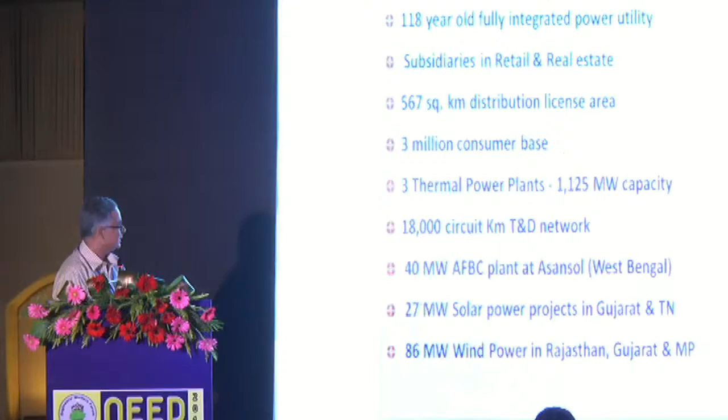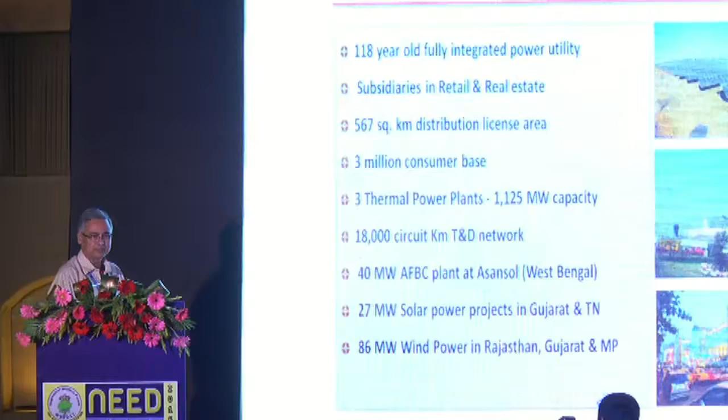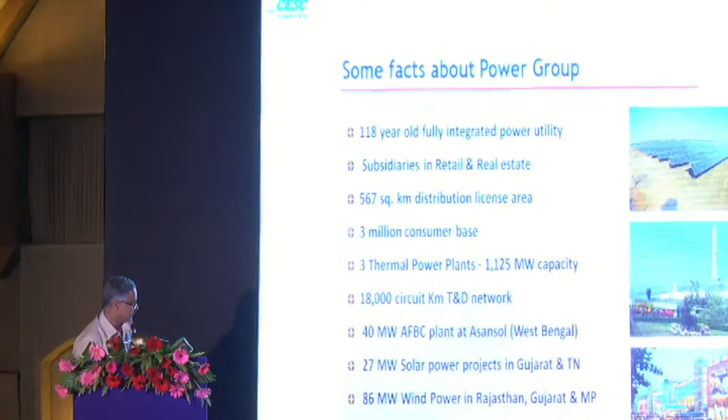A brief note about the power group of CESC. We are, as many of you know, a 118-year-old company. We have subsidiaries in retail and real estate, and we supply power to the city of Calcutta with a 3 million consumer base right now, and 3 thermal power plants in and around the city, 1125 megawatt capacity. We also have a 40 megawatt plant operated by our subsidiary in Asansol, an AFBC plant, and we have diversified to wind and solar, but that is not in West Bengal—it is in the states of Rajasthan, Gujarat, MP and Tamil Nadu. So 27 megawatt of solar and 86 megawatt of wind power.

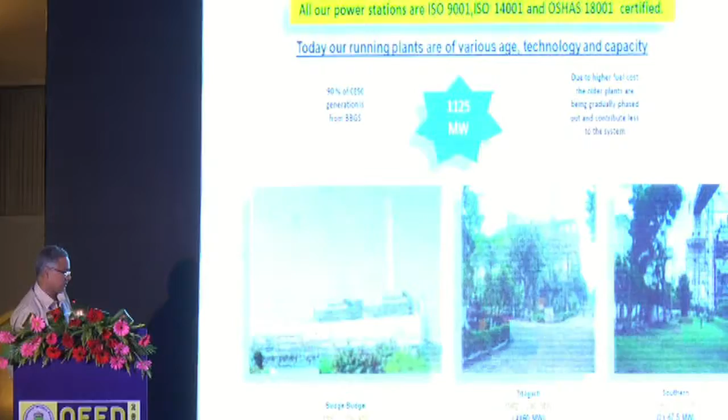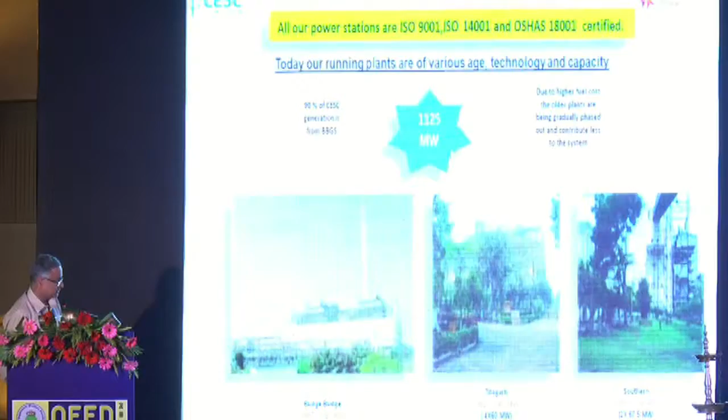As I was telling, we have 3 thermal power stations. The earliest one was Titagarh, set up in 1982, that is 240 megawatts. Next we had Southern Generating Station, set up in 1990, 67.5 into 2. And the latest was Budge Budge, 3 into 250 megawatts, started in 1996-97, and the third unit was finally put up in 2009.

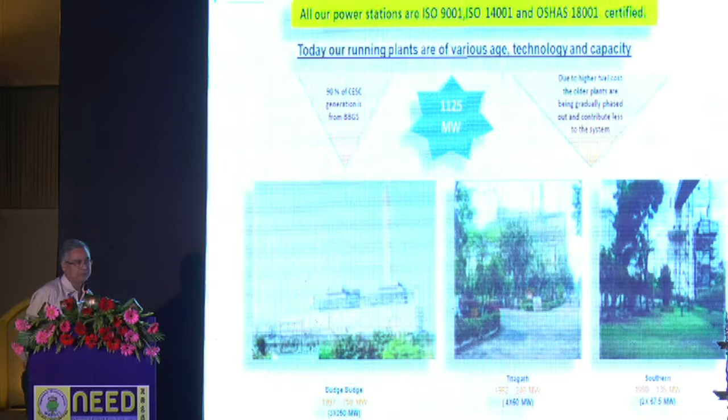Basically, 90% of generation currently is from Budge Budge, and as I've said, due to higher fuel cost, the older plants are being gradually phased out and they contribute considerably less to the system. So the competitiveness has somewhat been lost for these 2 plants, and that is why the generation has been reduced.

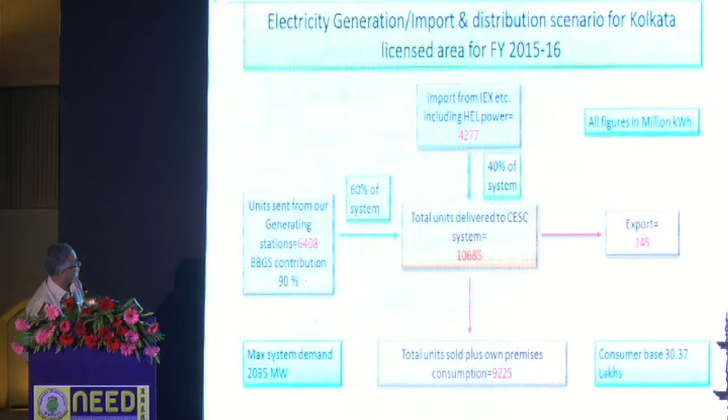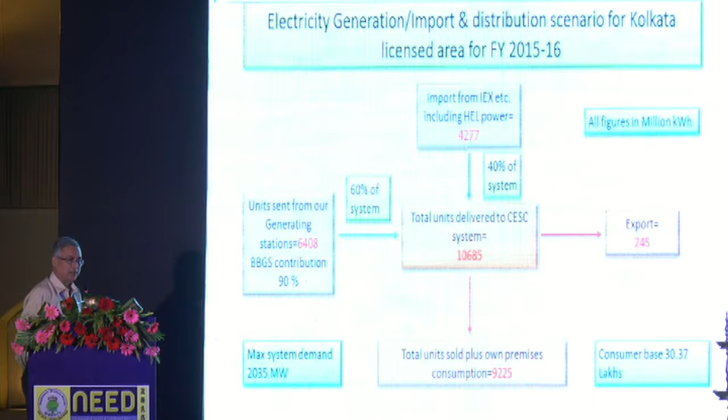This is a brief idea about the import, generation and distribution scenario for the Kolkata licensed area for the last financial year. The total units delivered to the CESC system, that is the 567 square kilometers, was 10,685 million units, of which the power generating stations contributed 6,400. About 4,000 came from Haldia Energy, and the units sold were 9,225, with a small amount exported. So basically, 60% of the power now comes from Budge Budge, and the rest, about 40%, is from Haldia and the power exchange. We do have to import power from the power exchange sometimes.

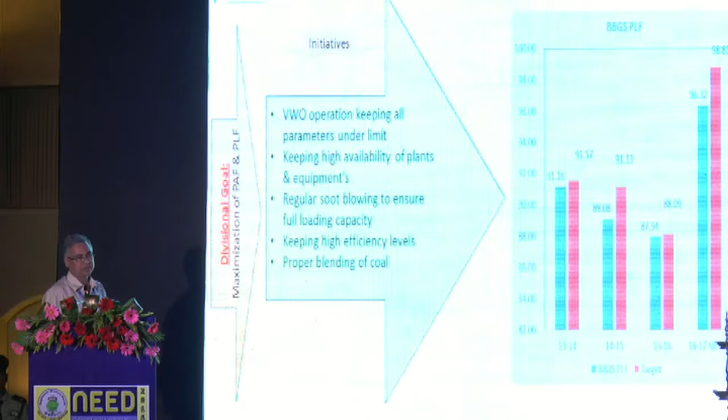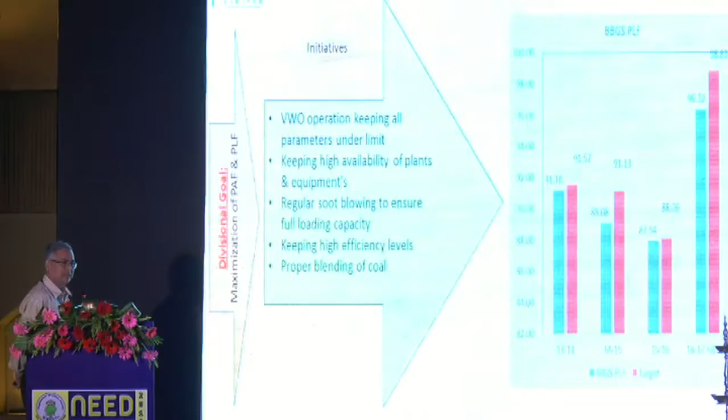So basically, in tune with today's topic of competitiveness, I would like to share some of the practices we do to keep the PAF, PLF, etc. of CESC plants at a high level. These are all listed here: VWO operation, keeping all parameters under limits for high availability of plants, and regular soot blowing to ensure full loading capacity. This is done in every shift, that is thrice a day, almost all the days.

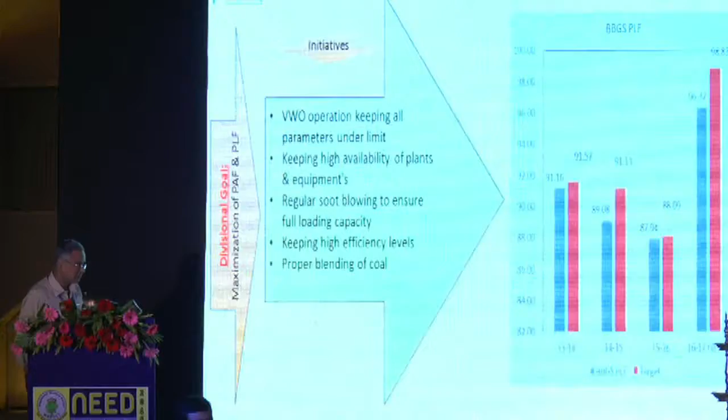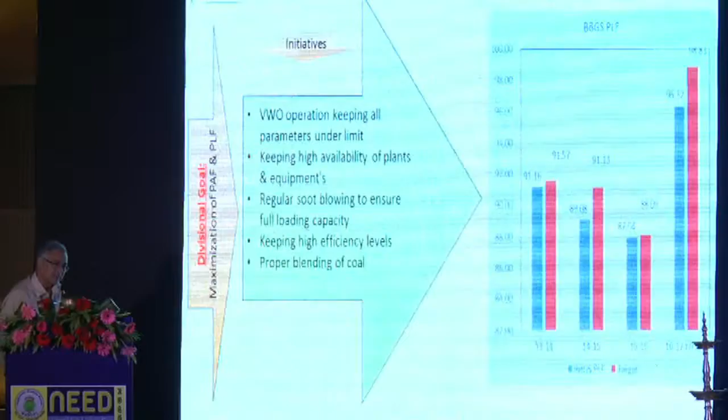As some of the earlier speakers were telling, judicious blending of coal is important. So we have to have some imported coal. We buy coal from BCCL, from ECL, and also from MCL. Some of these are very high in calorific value, some are low, so we resort to blending of coal in order to get the correct value of coal in the boiler, which is around 3,800 to 4,000—that is the design requirement.

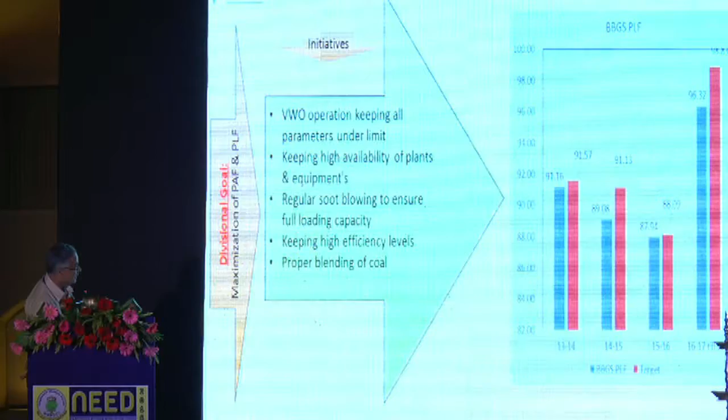As the graph beside this shows, these are the Budge Budge parameters. We are having a very high level of PLF, and in 15-16 it has shown a decrease, which is because of the increased generation from the Haldia plant.

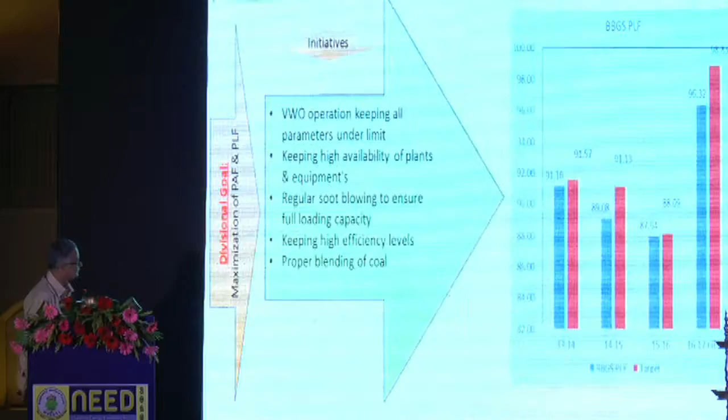Some other best practices we would like to share with the personnel assembled here: for the availability factors, we have to keep the outage period down. That is why we have resorted to working in 3 shifts, and our forced outage periods and planned outage periods are among the shortest.

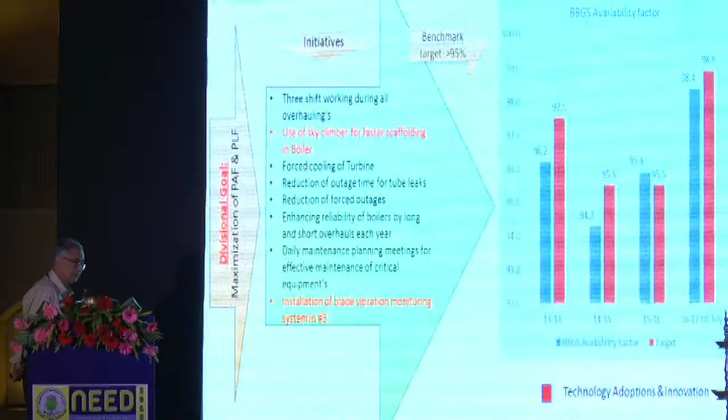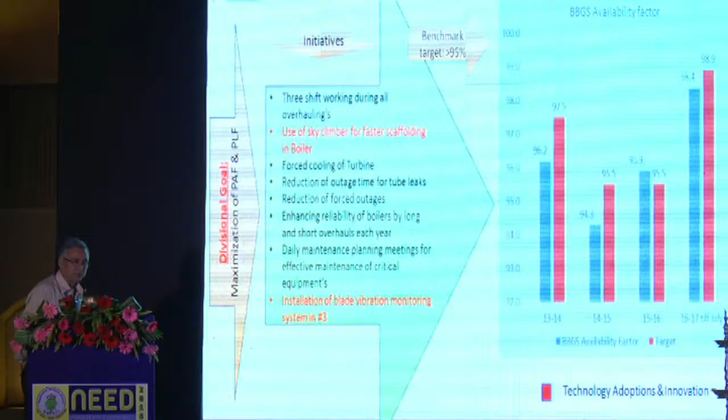Some of the other things which have helped us reduce the overall planned outage period are the use of sky climbers for fast scaffolding inside the boiler. We are also practicing forced cooling of all the turbines in the CESC system. Earlier, for the plant shutdown to start, it used to take 3 days for the turbine to cool down. But now, employing forced cooling on all the turbines in the CESC system, we are able to start work within 24 hours.

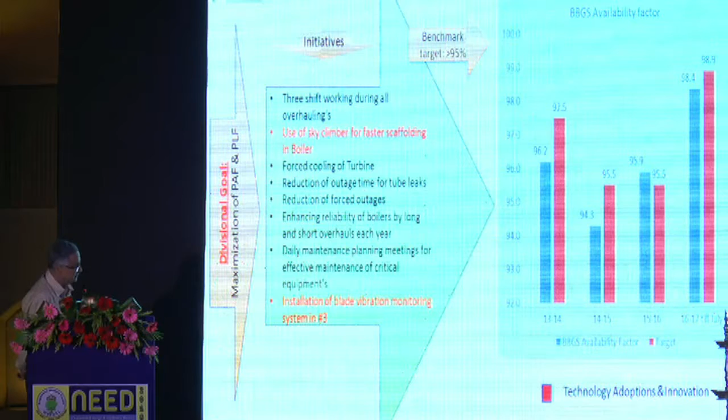This forced cooling has been done in collaboration with the OEM, and they have permitted us to use forced cooling with air, and this has helped us reduce the period. Consider this: it's only 1 day before we can start the job. Earlier it used to be 3 days.

One other factor is we attend tube leakages which occur very fast, enhancing reliability of boilers. Everybody does this - every 2 years we have a major overhaul, and every alternate year a short 3 to 4 day outage for checking and cleaning of the boiler. Other than that, we practice daily maintenance planning meetings for carrying out planning of every day's work.

One other thing to mention is that for the turbine, we have adopted the blade vibration monitoring system because subsequent to a major failure in Tata Power, which experienced a blade failure with a BHEL made machine similar to ours, we have also installed this blade vibration monitoring system in the 250 megawatt third unit of Budge Budge, and not in all the units.

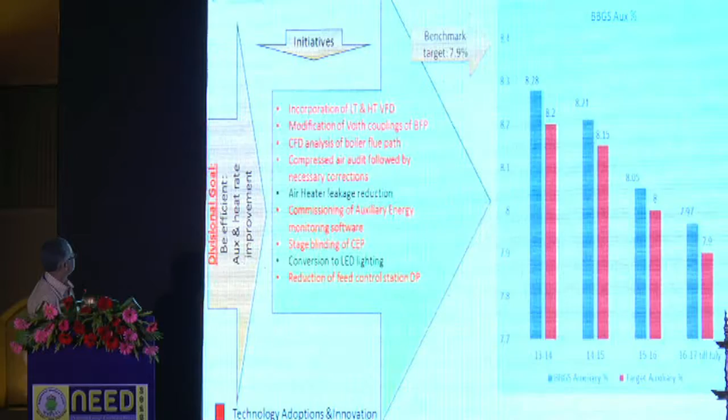A few other best practices for improving energy efficiency - as you can see in the graphic alongside, our auxiliary consumption is steadily declining, from 8.28% to last year we finished at 8.05%, and this year currently it is 7.97%, which may go up slightly because the outages are all in the latter half of this year.

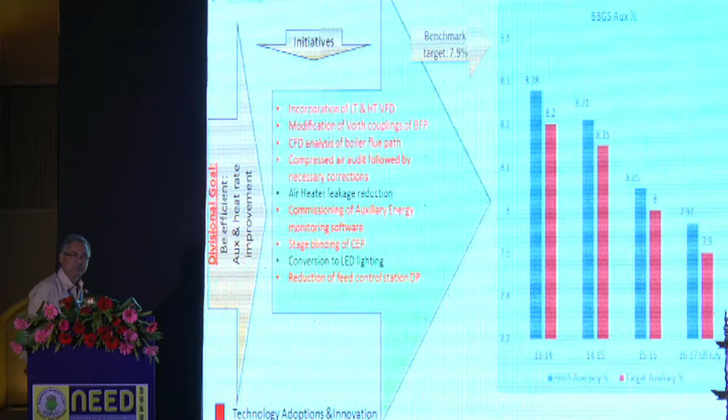So how are we able to do this - this continuously decreasing auxiliary percentage? Some techniques are not all our own brainchild. We have adopted significantly by benchmarking visits to other power stations, and by attending similar seminars and national level meets at various fora. And we have incorporated a large number of VFDs.

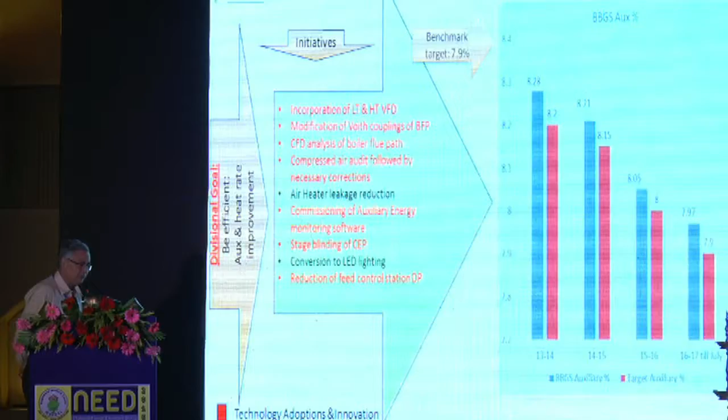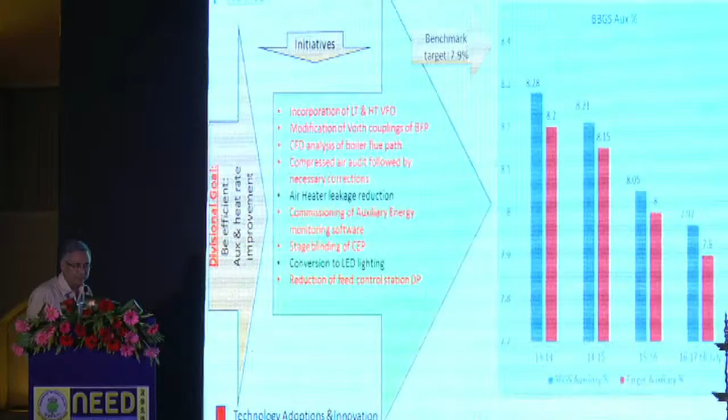Next, in the Budge Budge 2 units, we had tubular air heaters. These were quite old, almost 18-20 years old, and they have recently started showing a large amount of leakages. So what we have done is carried out retubing in one of the units, and another retubing is due this year.

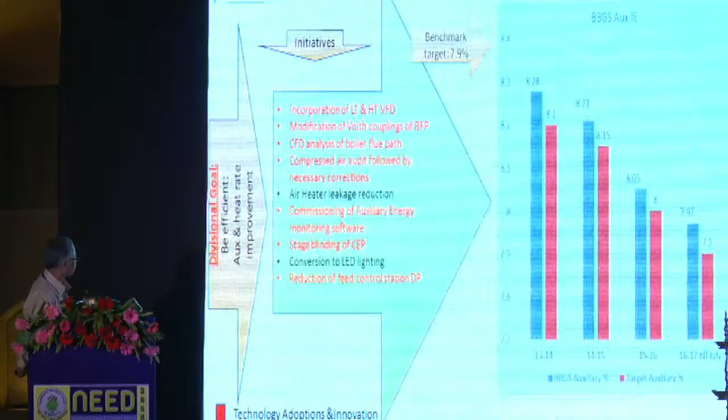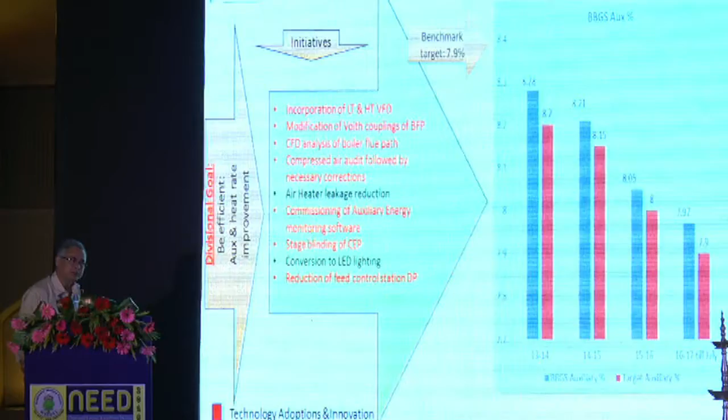To track the auxiliary consumption, we have installed the auxiliary energy monitoring software by Schneider, and that way we are able to keep a daily track on all the auxiliary consumptions. We keep a note around the kilowatt per megawatt consumption of all the major auxiliaries, which has helped us keep track of auxiliary consumption on a daily basis.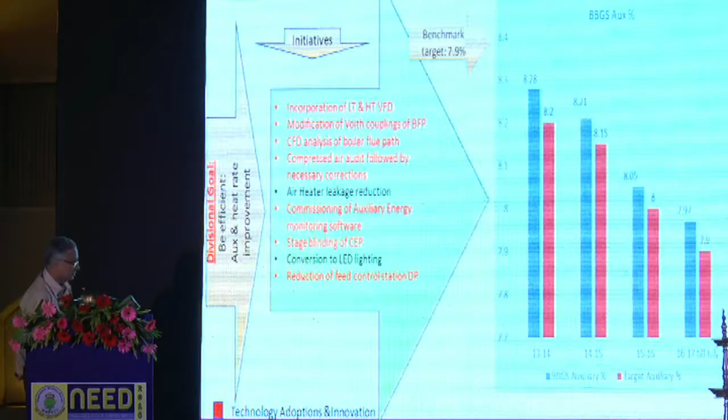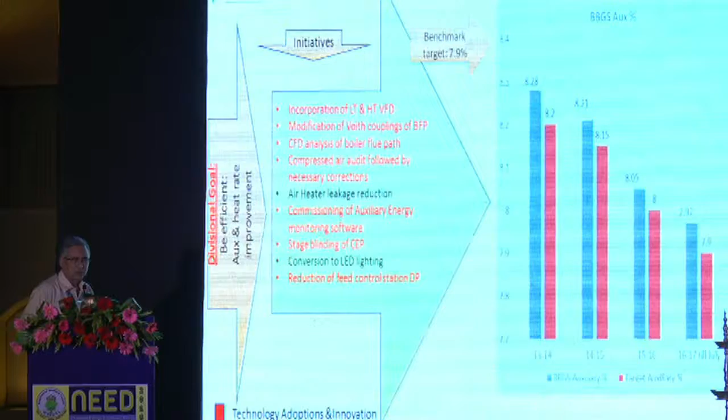One other major thing which many of you may have already done - the CEPs are generally over-designed in many plants. So what we have done is reduce one stage of the CEP to give better power consumption and improve power consumption in the CEP. That is what we call stage blinding of the CEPs.

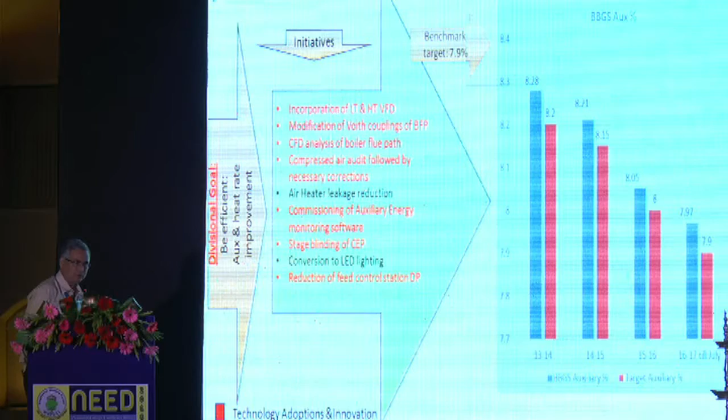We are also slowly converting to LED lighting, and reducing the feed control station DP by simple modification of the logic. So the feed control station DP is now only 1.8.

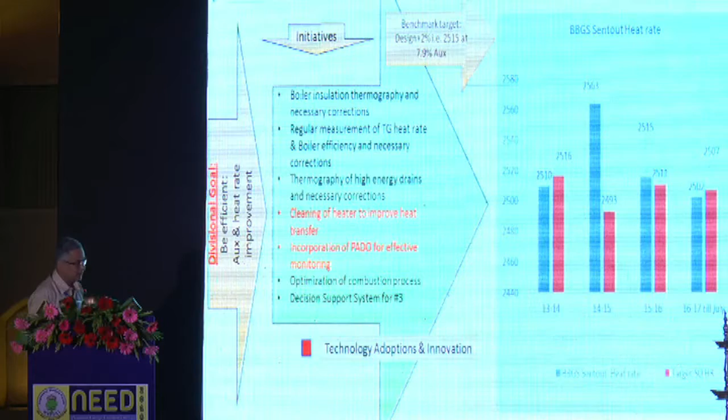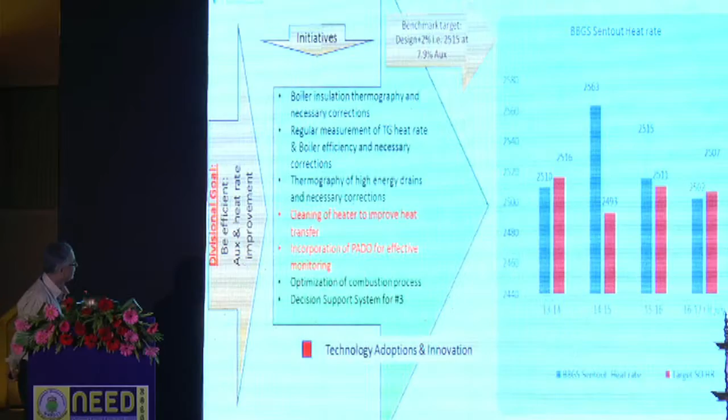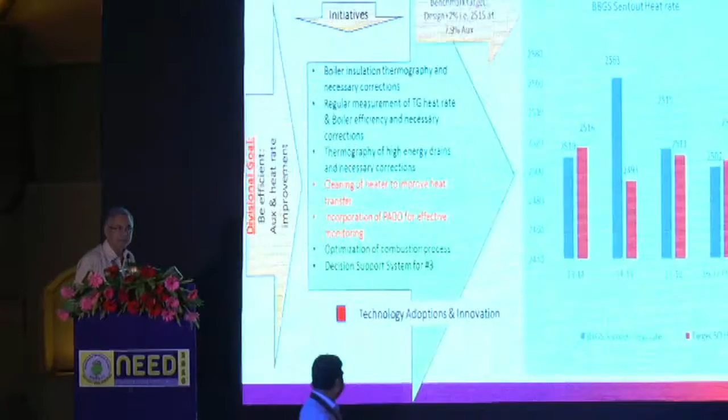As far as energy efficiency, some more practices that CESC is following - as some of my earlier speakers were also telling about, we carried out detailed thermography analysis of the boiler insulation. To our surprise, since insulation is normally a neglected area, we found temperatures almost in the range of 200 to 250 degrees in some locations, basically from front pass to back pass - that vestibule area is very, very high in temperature.

So we spent a lot of money renewing the insulation and also on design change, because in 1995 the APL boilers were designed with only 105 millimeter thickness of insulation, whereas the new generation boilers, the third unit of Budge Budge, have 160 millimeter thickness. So at that time the design didn't fully consider the energy efficiency part of it, and now the high heat loss zones have already been changed to 200 millimeter insulation.

So boiler insulation thermography and necessary correction - that is, changing the design to higher thickness - and we carry out in-house measurement of TG heat rate and boiler efficiency. In fact, my department is currently carrying out in-house boiler efficiency and turbine heat rate tests, on a bi-monthly basis for boiler efficiency and monthly basis for TG heat rate, and feedback is given to all the stations about their current performance levels.

One other practice is cleaning of heaters, especially HP heaters. This was an area neglected by and large, but we learned from one of our collaborators, J Power, that HP heater cleaning can also give benefits. An Indian agency based in South India carried out HP heater cleaning by water jet only, and at Southern Generating Station they carried out acid cleaning with low concentration of acid, which led to significant gain in feed inlet temperature by around 3 to 4 degrees, which leads to a rise in efficiency.

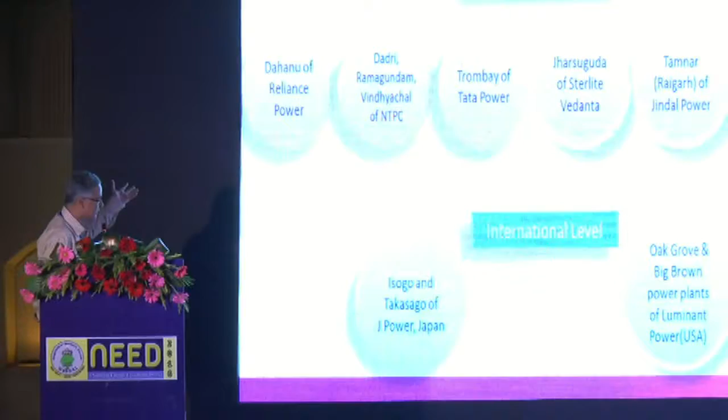This is what benchmarking is about. I won't go through all the details. Some examples of benchmarking CESC has done: our teams have visited power stations like Reliance Energy Dahanu, Dadri, Ramagundam, Vindhyachal of NTPC, Trombay, Tata Power, Jharsuguda Sterlite Vedanta, Tamnar of Jindal Power, and the Black and Veatch remote monitoring facility, and Tata Power remote monitoring, because we are also going to introduce remote monitoring for the stations.

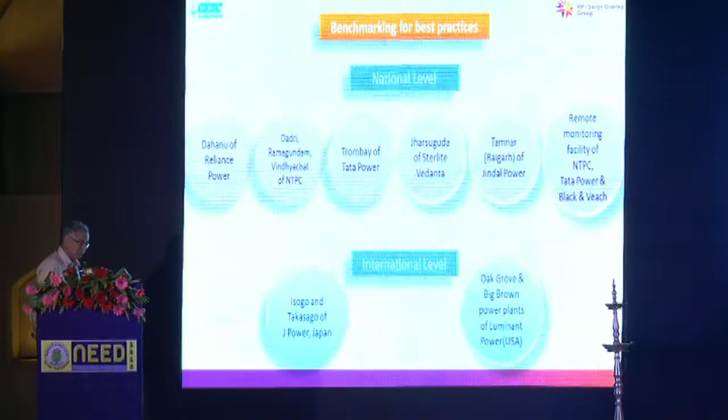At the international level, our senior officials have gone to Japan, to Isogo and Takasago of J Power, which I am going to show in the next slides, and also to some plants in the USA.

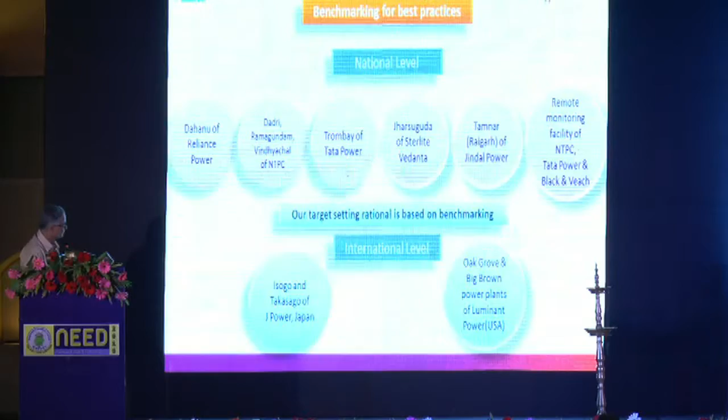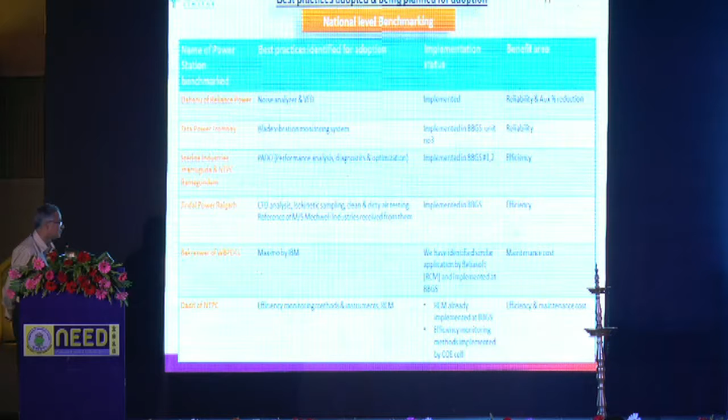Some details about what we have learned from where: from Dahanu we learned about noise analyzers and VFD drives. From Tata Power, the blade vibration monitoring system, which we have already installed. From Sterlite Jharsuguda, we saw they use PADO, and we have also implemented it. From Jindal Power Raigarh, CFD analysis and isokinetic sampling of PF, clean air and dirty air testing, which we have started doing in Budge Budge. From Bakreswar of WBPDCL, we saw the Maximo of IBM at work, and we identified a similar application by Reliasoft for reliability centered maintenance. And from Dadri, we learned how they monitor efficiency using in-house instruments and methods, and my department is currently practicing all this.

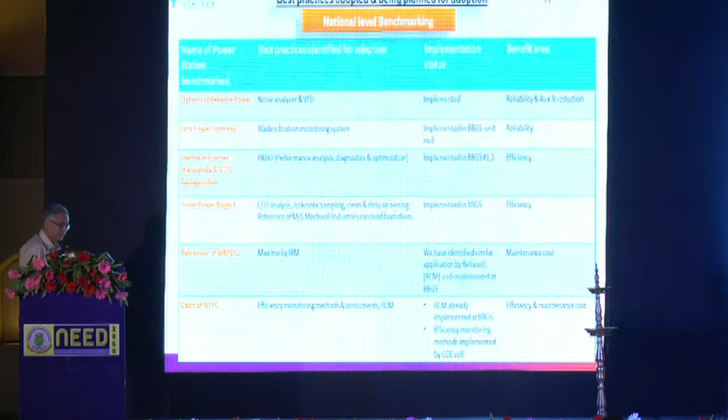Some other benchmarking examples, international benchmarking from Japan: we learned about the small area of the power plant, their most efficient insulation, their housekeeping, and centralized vacuum cleaning. From the Takasago power plant of Japan, we learned about HP heater cleaning and turbine overhauling, which they carry out every 4 years. We are currently at every 6 years.

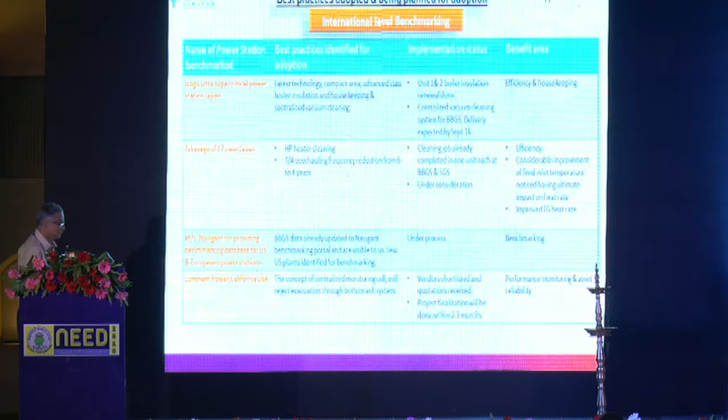There is an agency called Navigant Technologies which provides details about international power plants. We have subscribed to their website and are getting details of international plants from them, so we are doing international benchmarking as well.

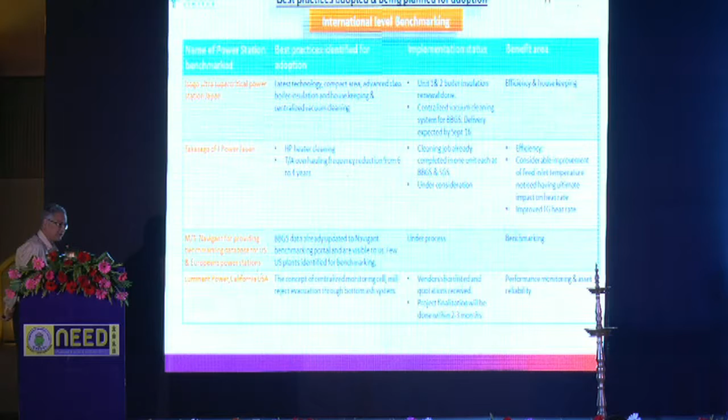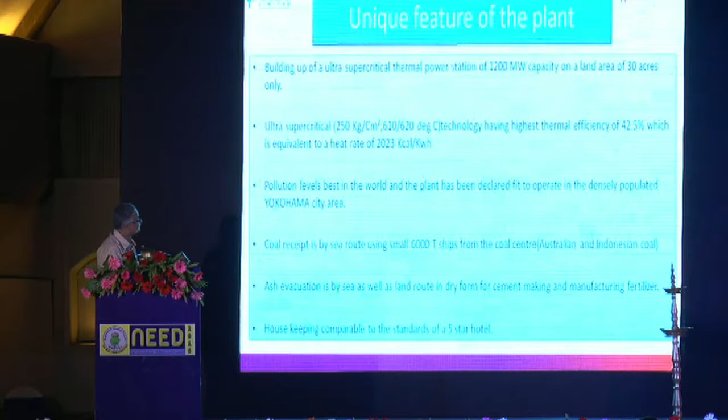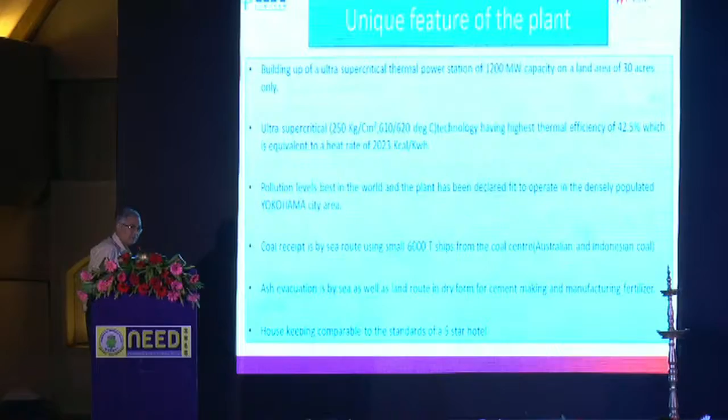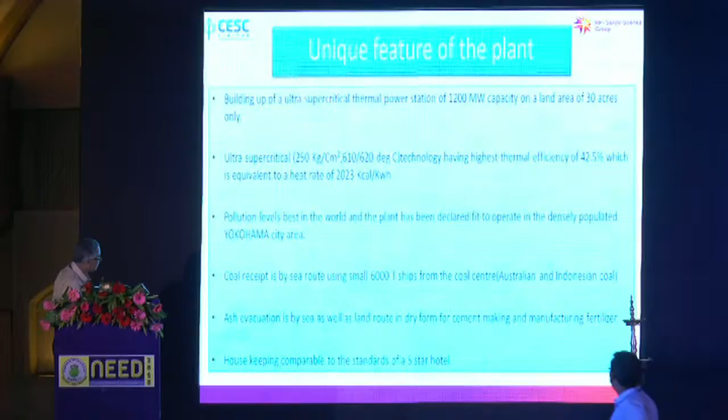As I was telling you, some of our senior officials visited Japan recently last year, to two J-Power plants, but there is a lot to learn from what they are currently practicing. The most surprising part is 1200 megawatts in just 30 acres - this is unimaginable for us. It's ultra supercritical, 250 kilograms per square centimeter, 620 degrees centigrade, and thermal efficiency of 42.5, whereas we are now at 35, 36, 37. They are at 42.5, which is equivalent to a heat rate of 2023 kcal per kWh. Pollution levels are best in the world, and this plant is located in a very densely populated area.

Coal is received by ships. I will show you the picture, that way we will be able to understand better.

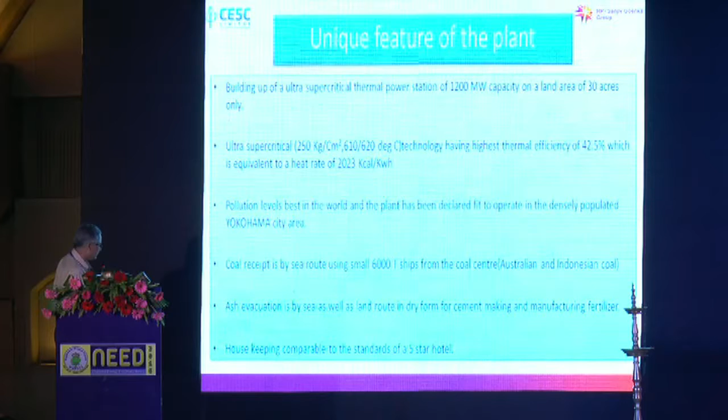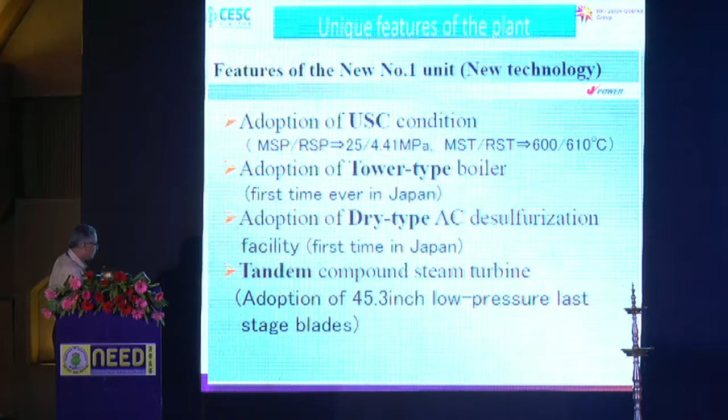Ultra supercritical conditions, tower type boilers, dry type flue gas desulfurization and denoxification, and tandem compound steam turbine. So the boiler is an RC building, basically on 4 RC slabs. That was the first time in Japan they did it. The turbine building has the office and the operation centers.

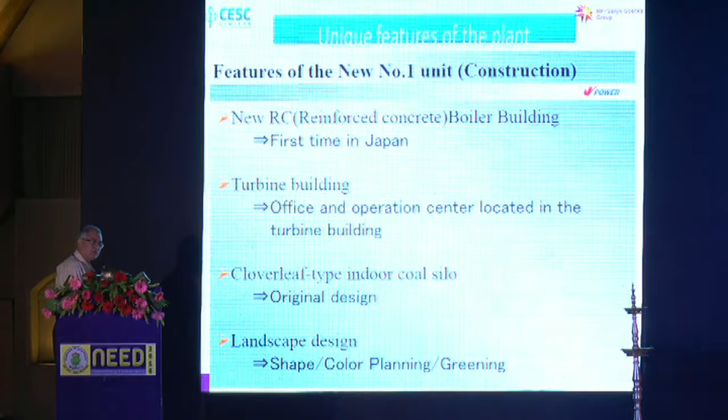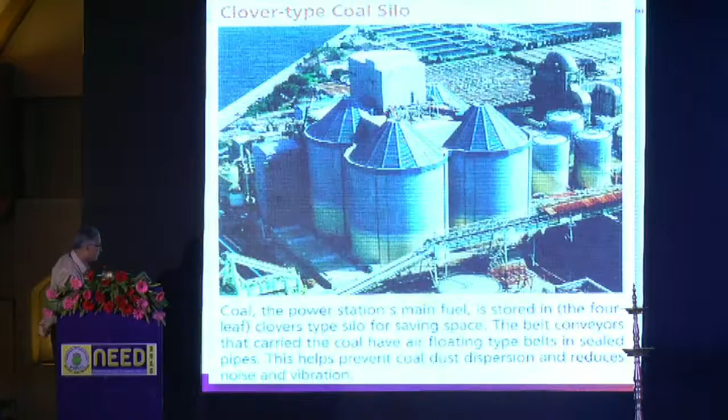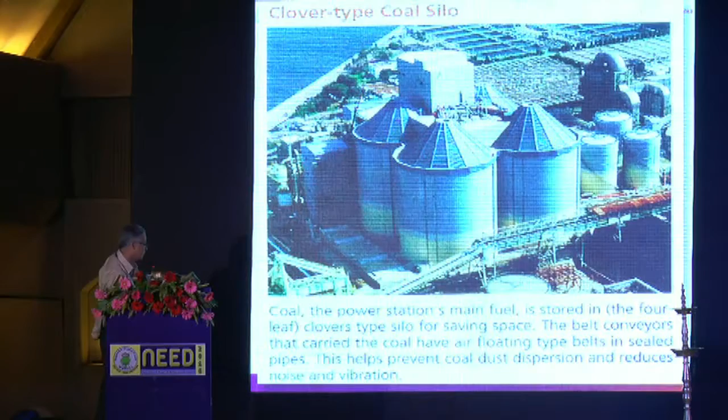So this is a close-up shot of what is called the Clover type coal silo. They have 4 numbers, and this is for saving space. And the conveyor belts that carry the coal have air floating type belts, which I will show you. And there is no dust at all. No covered conveyor belt inside a pipe. And there are no idlers, only air pressure is keeping up the conveyor.

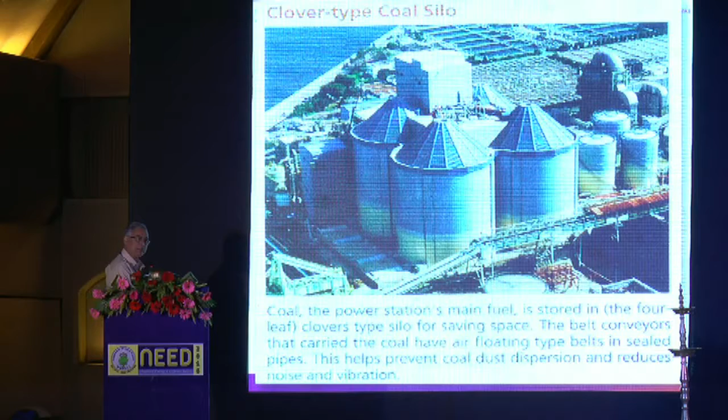So, covered coal silo. So this is the coal conveyor. It's a covered conveyor. The belt has no idlers. It's called an airlift type sealed tube conveyor, and idlerless. There is no fugitive emission.

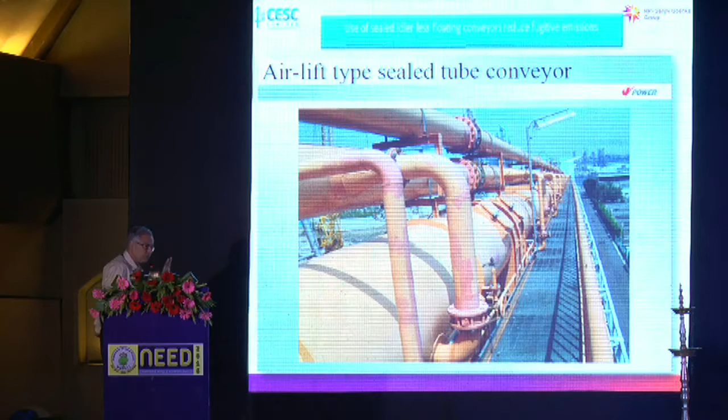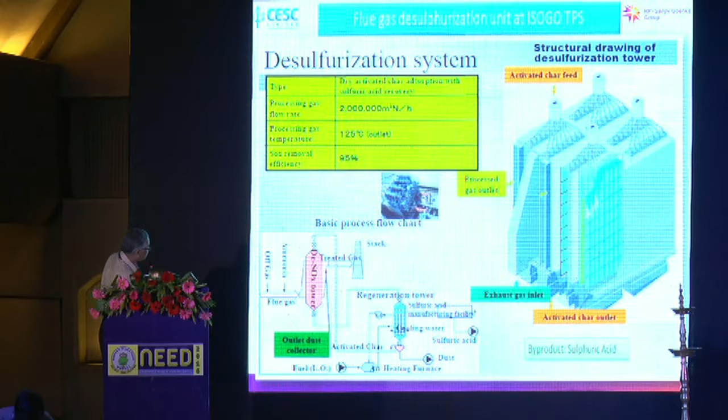So they have an FGD unit, and FGD is a traveling desulfurization, it's a dry activated char adsorption with sulfuric acid recovery, and flue gas is going up, and activated charcoal bed is coming down, and ultimately the end product, the byproduct, is sulfuric acid. What is most interesting to note is the pollution level.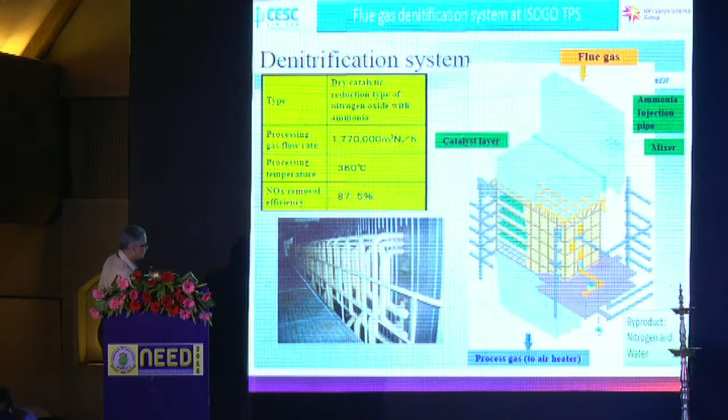So for denitrification, they have dry catalytic reduction with nitrogen oxide with ammonia, and that is also there. So both FGD and denoxification are carried out, and this is the output of that FGD and denoxification. The NOx ppm, their government, the Japanese government regulation is 200. They are running at 20 and 13, that is NOx.

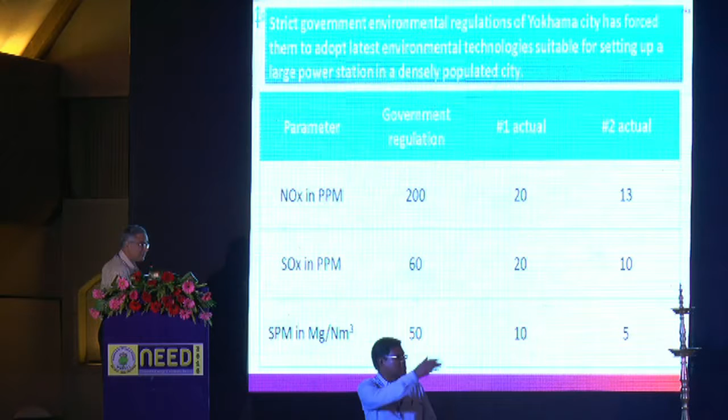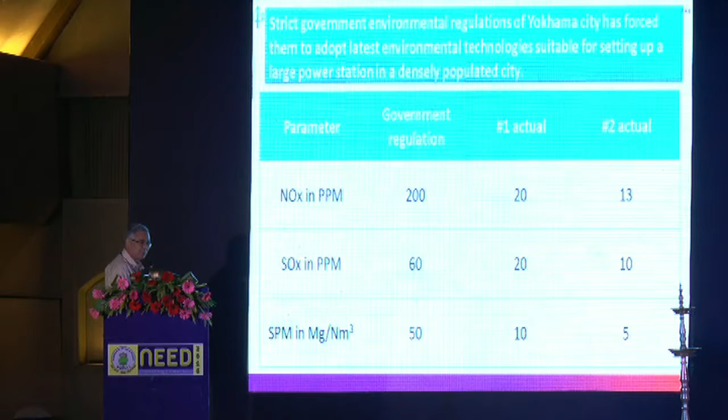Fantastic levels of NOx. Look at the SOx. Government regulation is 60, they are running at 20 and 10, unimaginable for us. And SPM, government regulation is 50, they are running at 10 and 5. So these are mind-boggling figures, but that is the use of technology by J-Power. We hope to achieve this sometime in the future.

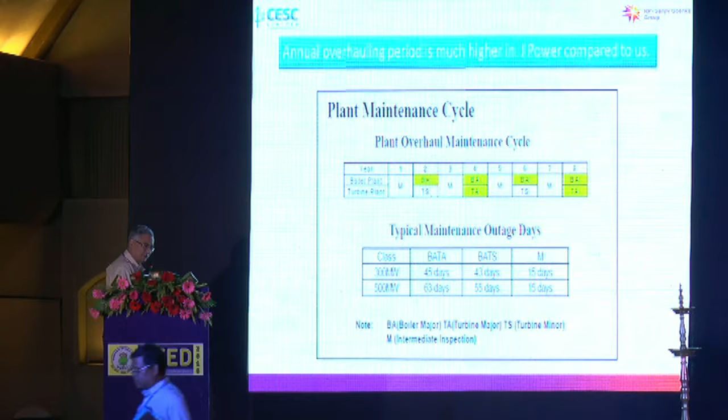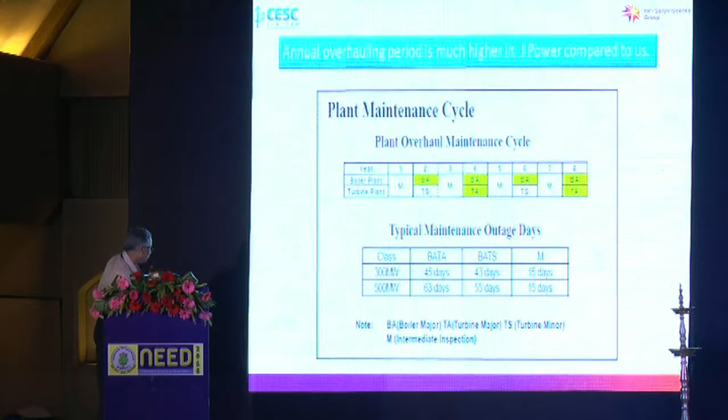So there, basically, for the 500 megawatt units, the boiler major overhauling is done in 63 days and turbine minor in 55. And anyway, the main thing to be emphasized is that their outage periods are not low. They carry out all the jobs in great detail and their outage periods are high.

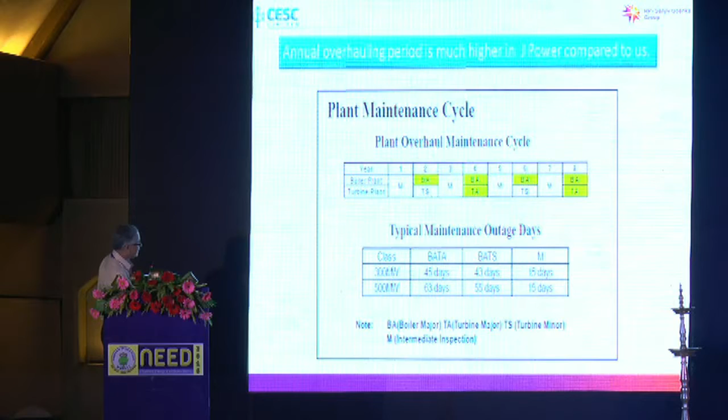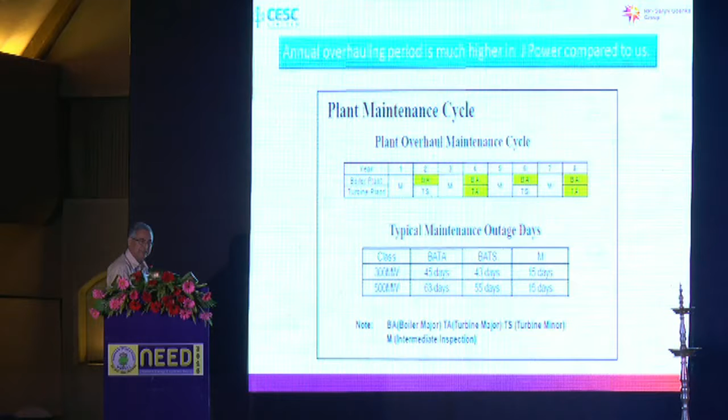And one other thing is that every major overhauling of the turbine is carried out every 4 years, because they believe that after 4 years the turbine efficiency degrades and it is better to carry out the overhaul in 4 years. Current CESC practice is 6 years, and we are thinking of moving to 4 years, because the loss in heat rate that occurs in the next 2 years will be more than offset by the increased efficiency.

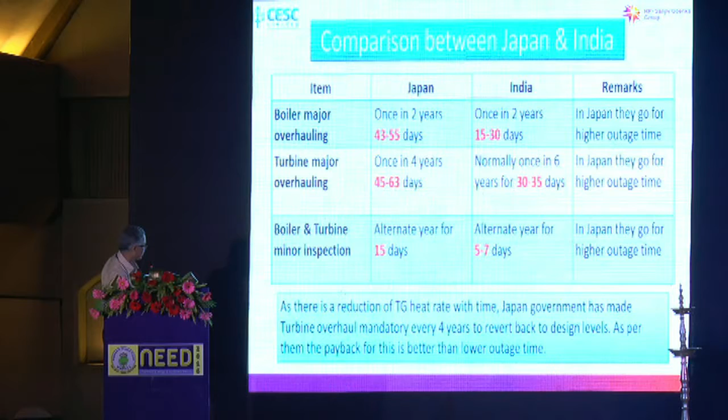So in this comparative analysis, boiler major overhauling is 43 to 55 days, ours is once in 2 years, theirs is also once in 2 years, but we are now at 15 to 30 days. So as I was saying, they go for a higher outage time. And turbine major overhaul is once in 4 years, as I was telling you.

Okay, so as I was telling you, there is a reduction of TG heat rate with time. So the government has made the turbine overhaul mandatory every 4 years to revert back to the design heat rate levels.